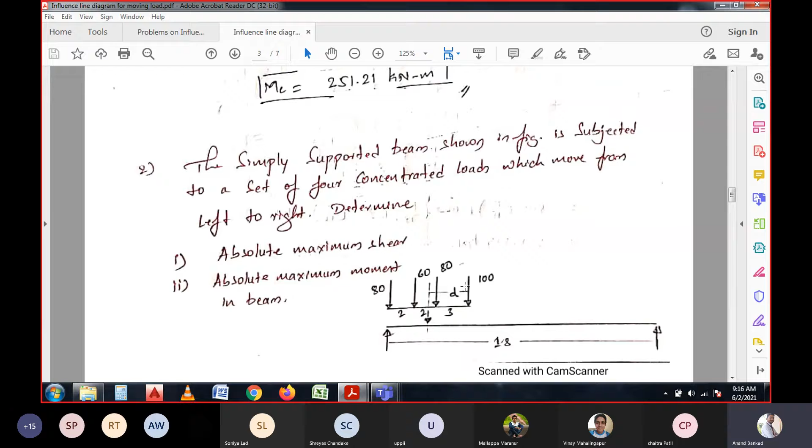But here, no section is given, and they have not asked to calculate the shear and moment at any particular point. Instead, they ask in general to determine the absolute maximum shear force as well as the absolute maximum bending moment for the beam, for this series of concentrated loads moving from left to right. So that is the question. We need to understand that we are not aiming to calculate at any specific section — that is the only difference in this problem.

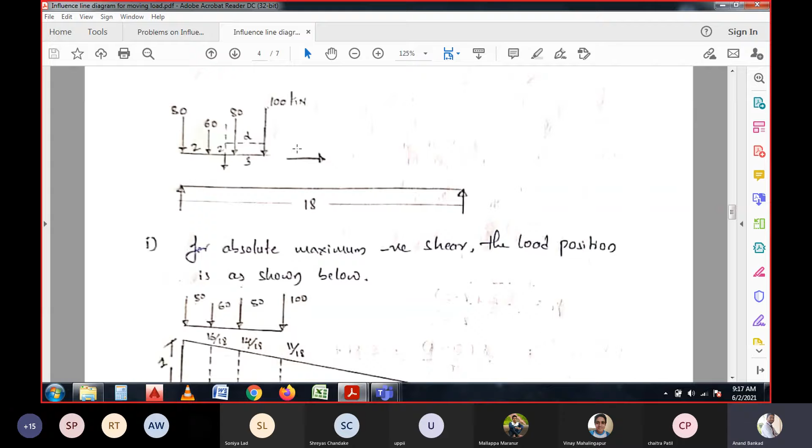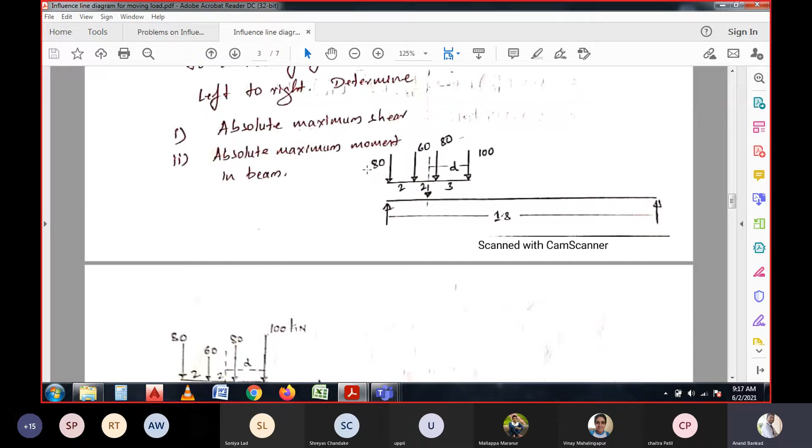So once we start the problem, the question needs to be carried forward for further calculations. We have an 18-meter span with two supports on either side, and the loads move from left to right, with an arrow showing the direction of movement. In this question, they have already given the set of loads, identifying which load is leading and which load is trailing.

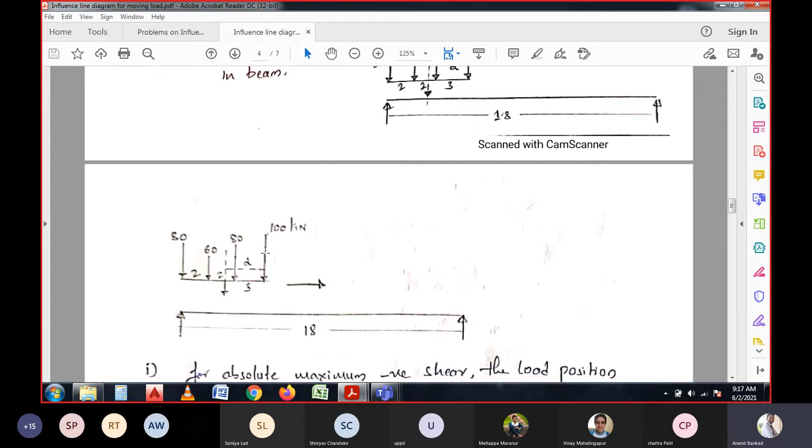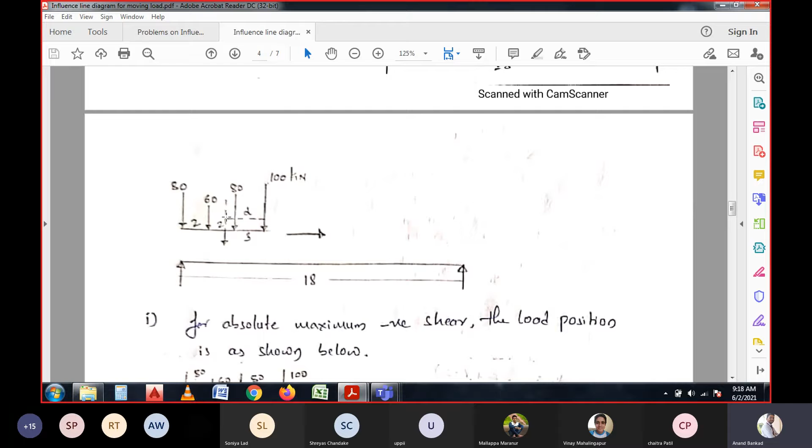On that basis, the load positions are considered. In other cases, the moving loads might be given simply as a trailing load and a leading load, and based on that we set up the loads. But in this question, the set of loads is given directly in the diagram: 100 kilonewton, 80, 60, and 80 kilonewton loads. These four concentrated loads have a distance of 3 meters between the first two loads, and the remaining ones have 2 meter consecutive distances. So, if we want to calculate the maximum shear force, what do we need to do?

Whenever the maximum shear force is calculated for any section, the load on the section should be considered near the point where we are going to calculate the shear. That means, for a particular beam, I would like to demonstrate this.

Let's take a few seconds here. So, if you see a beam with a support, and the particular beam is to be calculated for shear force — if you apply the load at the center, then the shear force value will be almost equal to zero. But if you apply the load near the support, then the shear force value will be maximum.

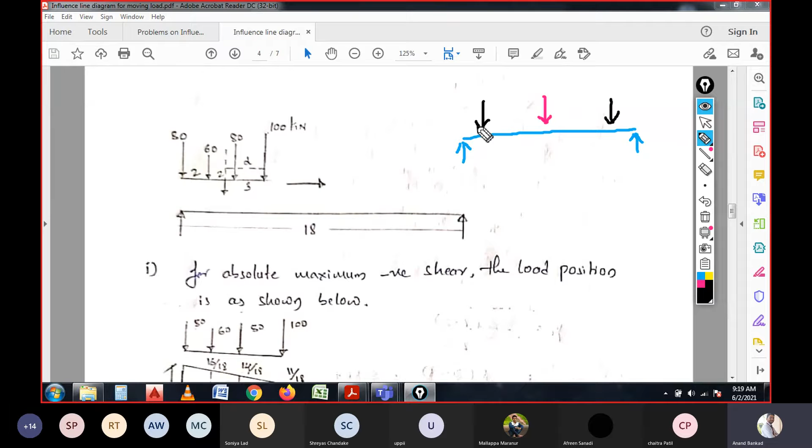Do you people agree with this content? Are you people agreeing with this? When the shear force or loads are acting near the supports, then the shear force will be maximum.

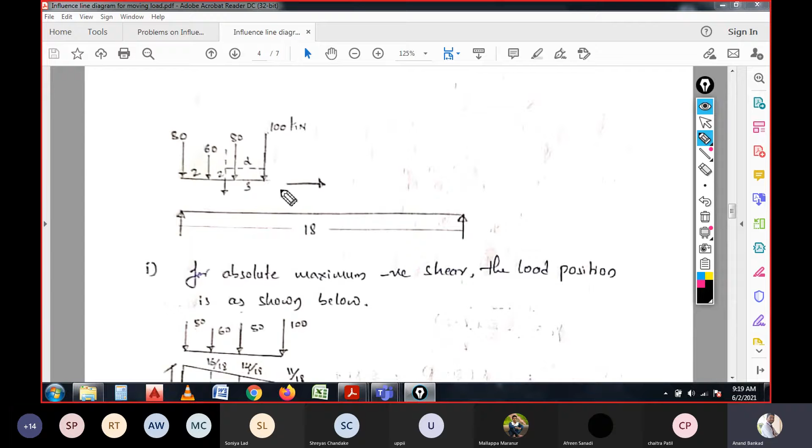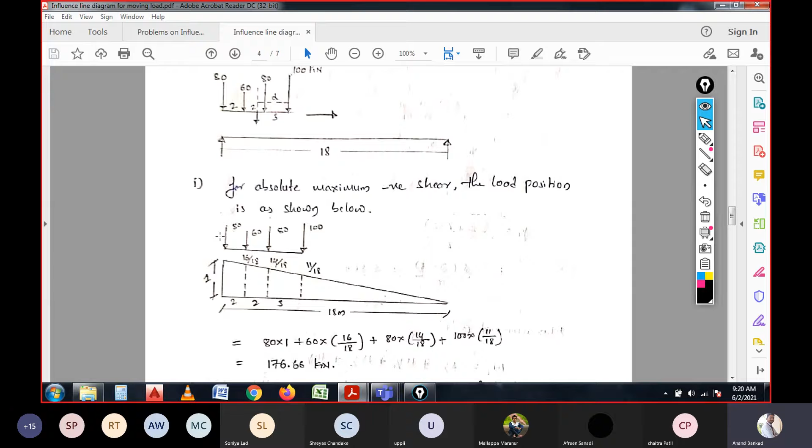Yes, okay. That means in this case, the same principle is adopted for calculating the absolute maximum negative shear. It is written as negative shear because we have considered the set of loads over the left supports, and the load positions are already shown in the diagram. So again, we need the coefficient values — and how do we get these coefficient values?

Just see, I hope it is clearly visible. For the set of loads, the 80 kilonewton load is acting at the point of support, and the remaining loads are acting with their respective distances. In the 18 meter span, the first set of loads is acting from the right support.

We can calculate from the right support and from the left support by referring to the distances. Here it is 3 meter, here it is 2 meter, and here it is 2 meter. So in the total 18 meter, how much is it? 3 plus 2 is 5, plus 2 is total 7 meters, and the remaining will be 11 by 18.

That means from this support, it is measured 11 meter to this point. How have we considered 11 meter? That is deducting this 2 and this 2 and this 3 meters. And from here to here it is 11.

Again, if you consider this point, then how will it be? 11 plus 3 will be 14 by 18. 18 is the total span. Again, for this concentrated load, the coefficient value will be 14 plus 2, which is 16, divided by 18. This is how the coefficient values are considered.

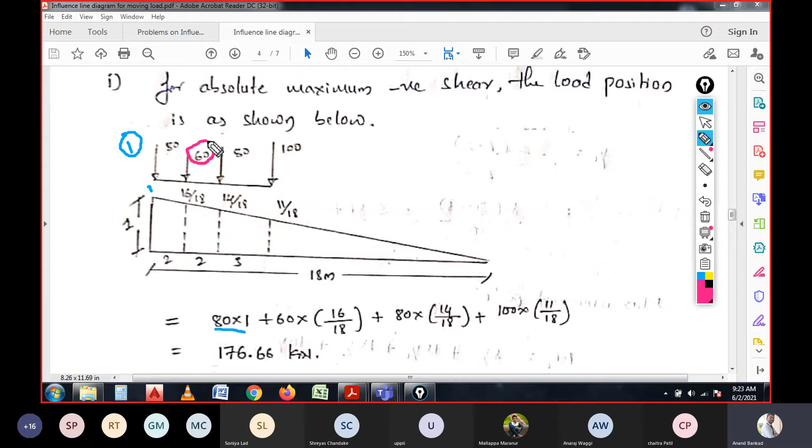So let us consider one by one. This is the first load, considering 80 with the intensity 1, that is 80 into 1. Next this 60 into 16 by 18 is considered here. Next we have this 80 into 14 by 18. Again we have 100 into 11 by 18. That means the intensity of load multiplied with the coefficient values.

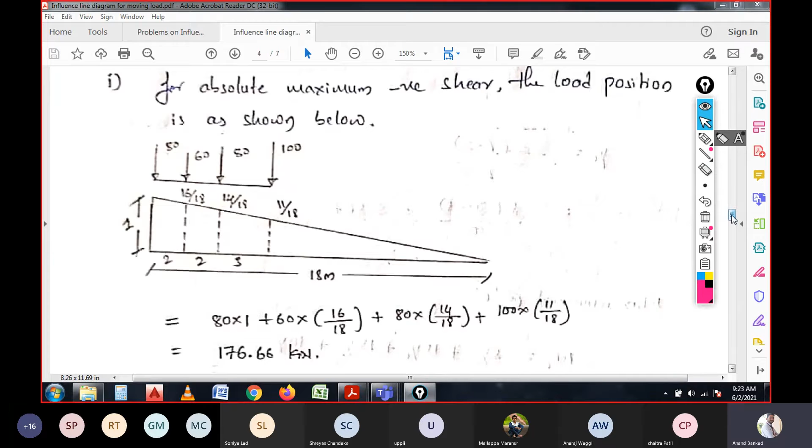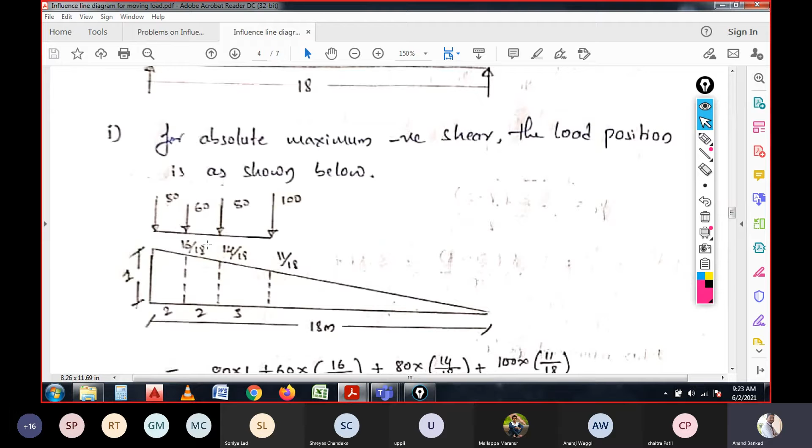The coefficient values you can always calculate in this manner. So once you solve this, it will be 176.66 kilonewtons at this support, when the loads are placed near support A. At the same time, if you place those loads towards support B, or towards the right, then we can say that is the positive shear force.

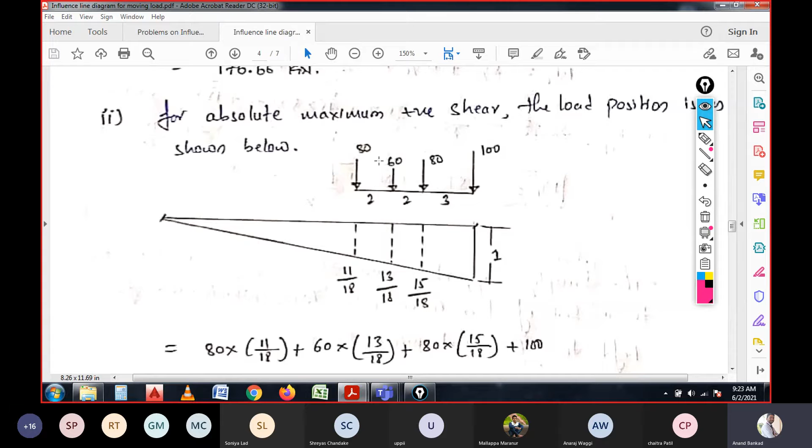Then again the loads are measured from the distance of the other end. So other end means, if you see, it is this end for the loads setting for the right side, whereas previously we saw for the left side, from the support on the left side. Again, if you measure, the first distance will be 11, the second will be 13, and here it is 2 meters.

In the total span of 18, if you see, 7 meters are deducted, then it will be 18 minus 7, which is 11. The 7 is because 3 plus 2 plus 2. So from here to here it is 7 meter, and the total distance is 18. In this 18, if you deduct this 7, from here it will be 11 meters.

And from this support to here, it will be 11 plus 2, which is 13. Again 13 plus 2 will be 15, and 15 plus 3 will be 18. 18 by 18 will be 1.

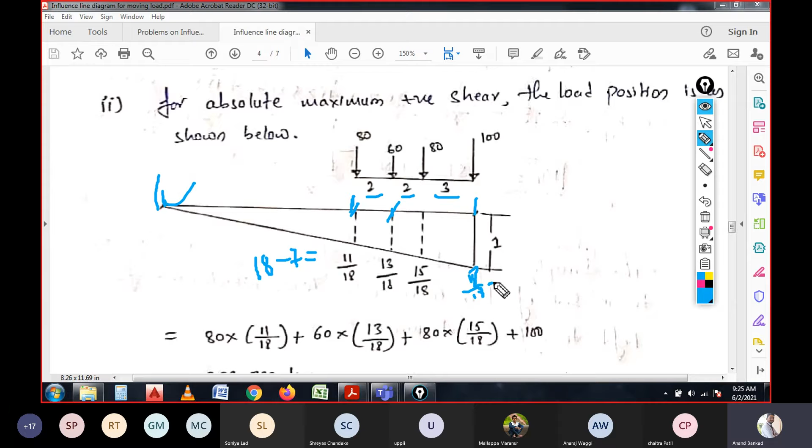So again, with respect to these, if you calculate the values of shear force, this 80 into 11 by 18 is the value here, and then 60 into 13 by 18.

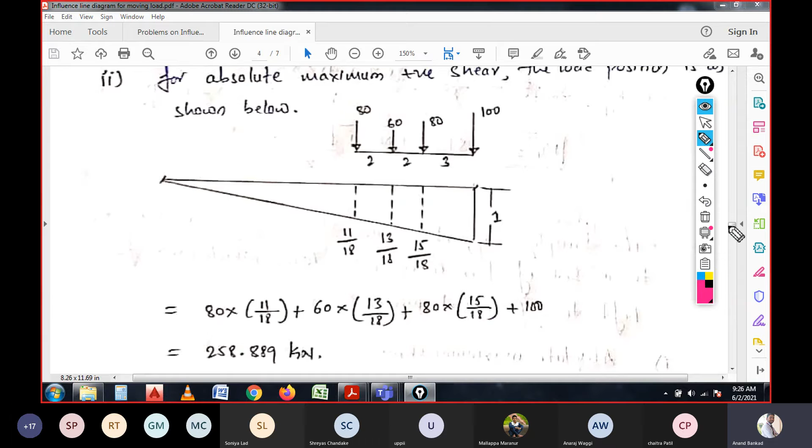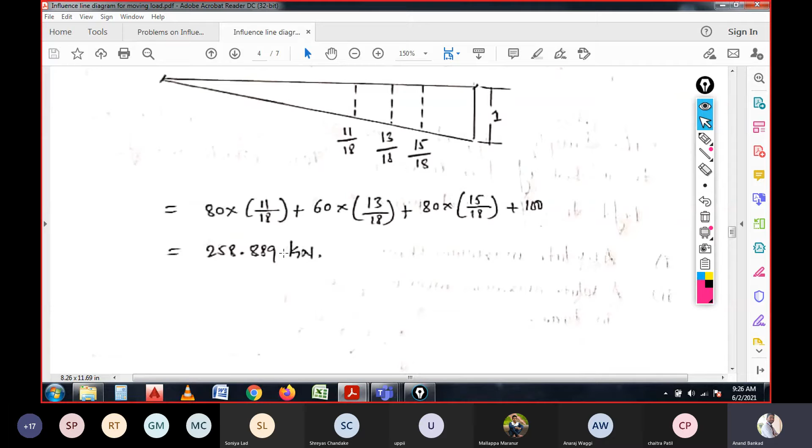We are multiplying the coefficient values for the intensity of load. Again 80 into 15 by 18, then 100 into 1, which is equal to 100. The total shear force we can expect from the load when it is placed right side near the support is 258.889 kilonewtons. That means the maximum shear force on the support, which is what they have asked to calculate, the absolute maximum shear force, is 258.889 kilonewtons. This is how we need to calculate the maximum shear force for the support.

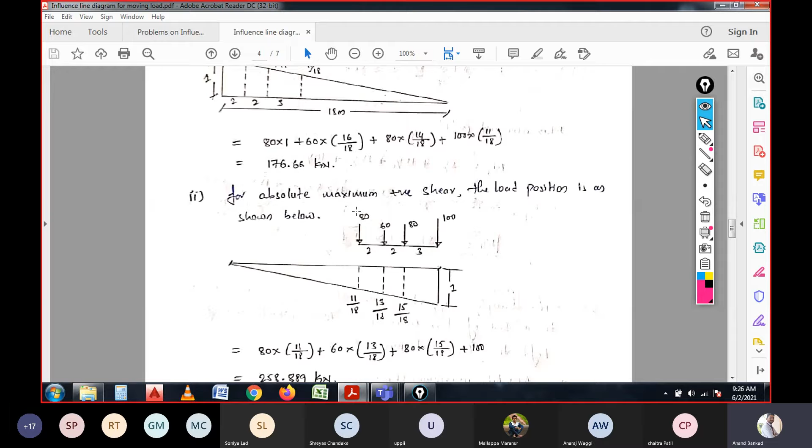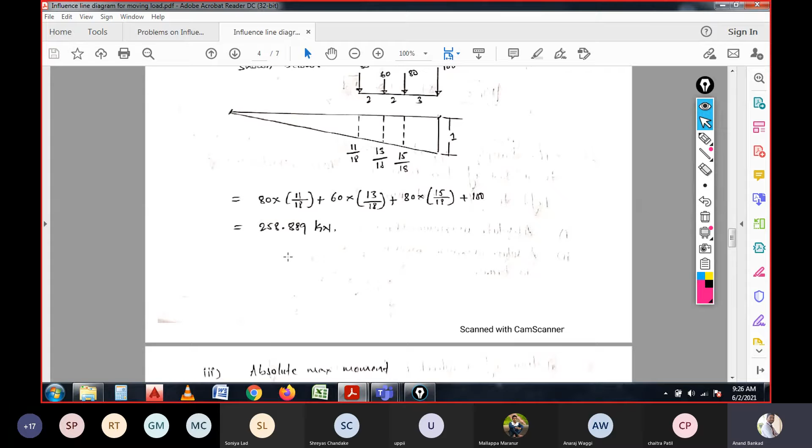But here we are not saying any negative shear force or positive shear force. Just we are saying that the maximum shear force, whether it is negative or positive. We are not representing with sign or any notes. Just the maximum shear force is calculated. Is this clear, dear students?

Yes, sir. Okay, remaining, how many of you people are listening over here? Is this clear? Yes, sir. Okay.

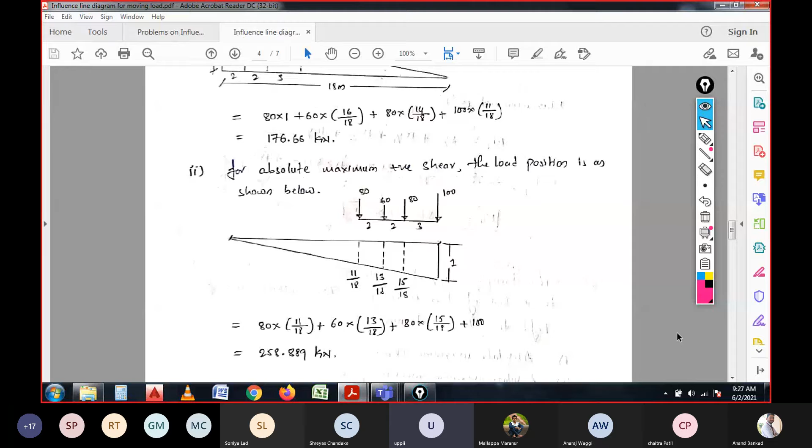Now another thing is absolute maximum moment. Next we need to calculate the maximum moment. This is a bit lengthier to calculate here, because the series of loads have different intensities. So for this we need to find the CG of the loads, the same thing we considered in the previous problem, and here too we need to carry out the same process. So for finding the absolute maximum moment, before that we should know, whenever a beam is loaded...

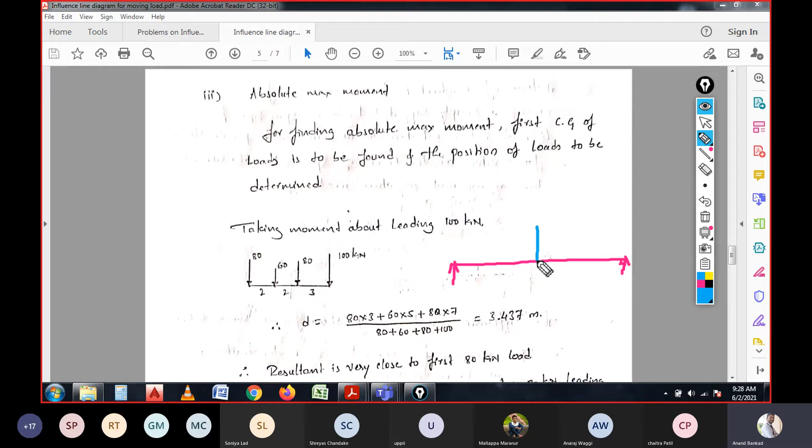If the beam is loaded with any kind of load, whether it is uniformly distributed load, concentrated loads, or uniformly varying loads, any kind of load, if the loads are placed at the center of the span, the bending moment will be in this manner. And if the particular load is placed at this point, the bending moment will be like this. And again if the load is placed at this point, the bending moment will be like this. That means the position of the load, where you place it, matters a lot.

So on this content, I would like to ask any one of you, please let me know, in which place, if you place the load, you get the maximum bending moment? In which place do you say or prefer to place the load or set of loads to get maximum bending moment? Center? At the center, right?

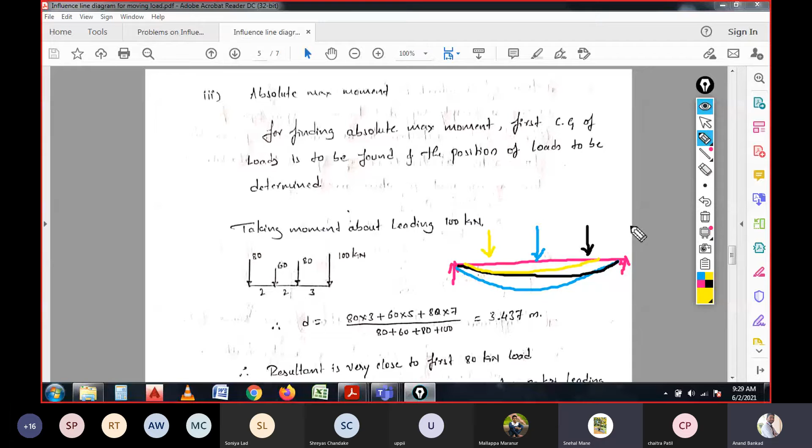Okay, so on this concept, if you see, here we have a set of loads, correct? In this set of loads, we need to have—we don't know exactly where the center of this set of loads is. But if we have only one concentrated load, then it would be easier for us to place it centrally and get the maximum moment.

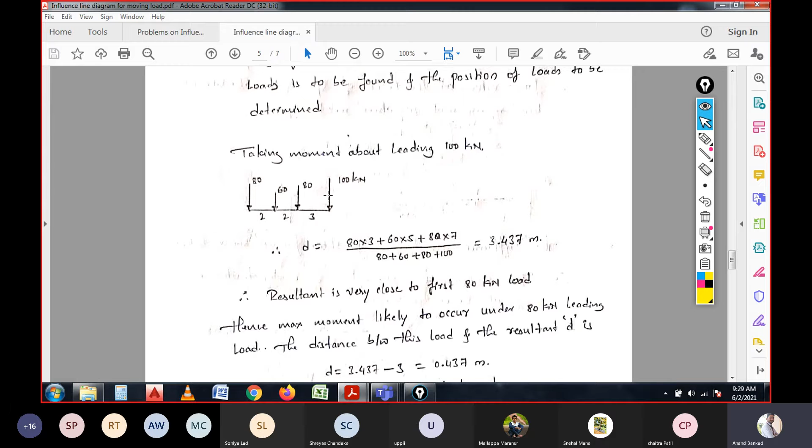But in this case, we don't have a center point for these loads. In that case, we are now calculating the CG of the loads. So how do you calculate the CG? That means we can take any one point as a hinge, then take all the loads and multiply them with their distances.

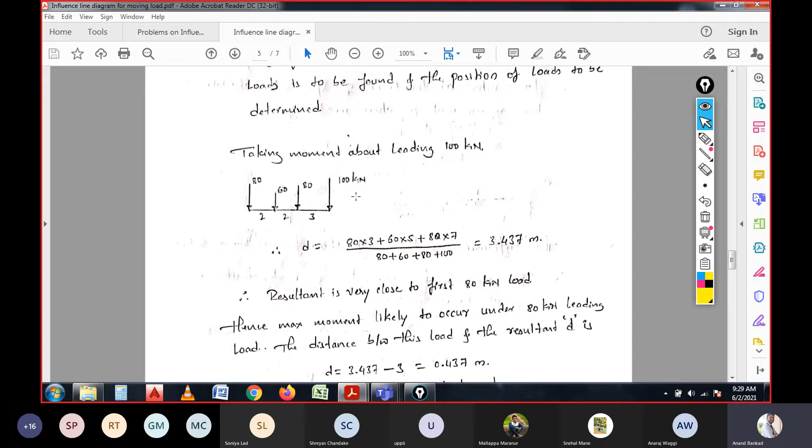So taking moment about the leading load, just observe over here how the calculation takes place for the CG. When taking moment about the leading load of 100 kilonewton—so for 100 kilonewton the leading load is considered—and this 80 into 2 plus 2 plus 3 is there. This 80 into 3 is the first one, and next 60 into 5, and 80 into 7. The same thing is written over here: 80 into 3, and that is 80 into 3 written over here, and then next 60 into 5 it is written over here, and then 80 into 7, that's 80 into 7 it is written, divided by the total sum of loads 100, 80, 60 and 80.

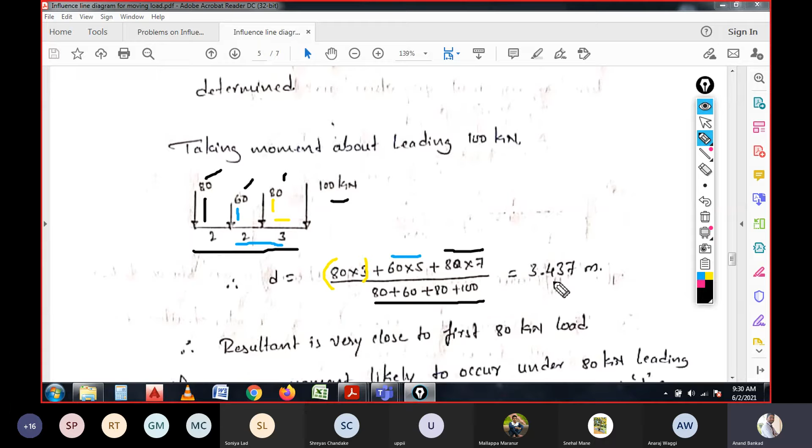So if you take all the set of loads, then you get 3.437 meters. So 3.437 meters, this distance—whatever distance we have got—is nearer to the load of 80 kilonewton, because we have taken the point over here. If you measure 3.437, it will be near to the 80 kilonewton load, right? That means it does not lie exactly at 3, it has some 0.437 meters of eccentricity, right? Are you getting what exactly I am telling here?

See, this is the load case, and here we have 100 kilonewton load, here we have 80 kilonewton load, and here we have another 60 kilonewton load, and again this is another load.

So for this, what we have got is 3.437. That will be again at this point itself. That might be lying with this, but here we have 3 meter. But here we have it is 3 meter, right? So the remaining thing is...

0.437, which is eccentrically acting for this 80 kilonewton load, right? So that means the distance of this one is 0.437. Are you getting?

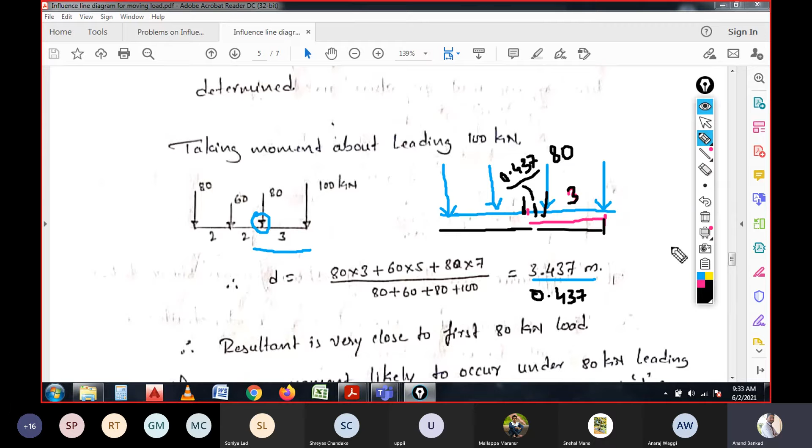So here, if you take the 80 kilonewton load, it is 3 meter, and remaining we have 0.437 meters. Am I right? So here, if the 0.437 is left, that would be considered on half, because we have to have the CG on either side. It is the point where, because on this point we need to consider the position.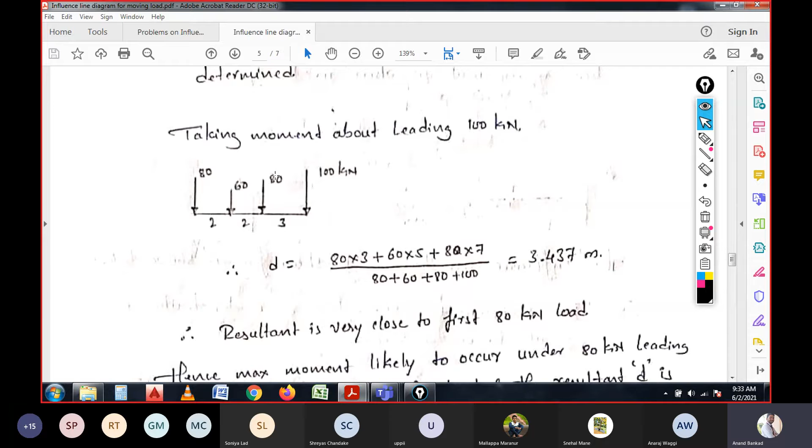The same thing I have written, what I have discussed, is written over here. Hence, the maximum moment likely to occur under the 80 kilonewton load, which is leading, because we have two loads over here. We have two 80 kilonewton loads, and this 80 is the leading one, that is why it is denoted with the notation 80 kilonewton leading load. The distance between these loads and resultant D, the resultant D is nothing but this one.

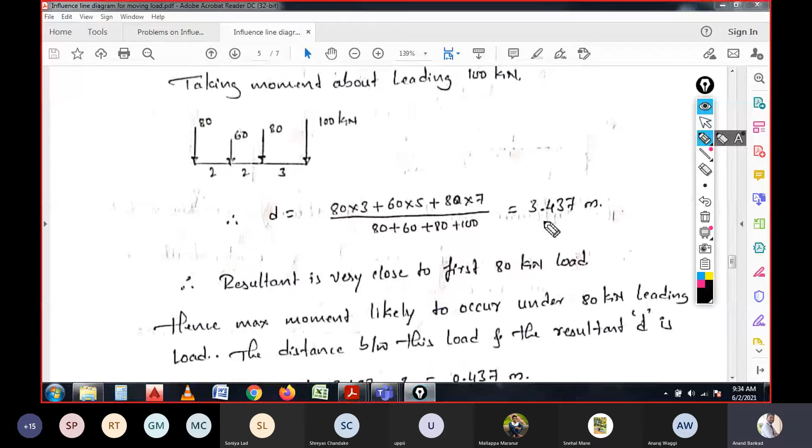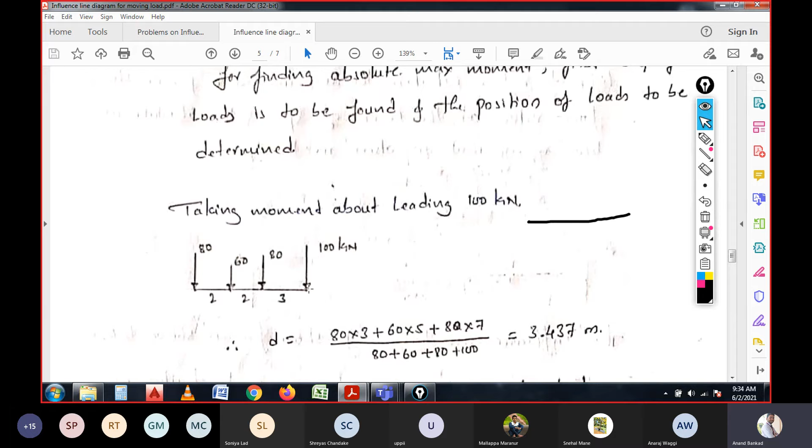Okay, so now D minus 3 meter. 3 meter is because this is the distance between 100 and 80, since we are measuring from here. So 3.437 minus 3 will be 0.437.

For this, now we need to have the CG, because the load needs to be placed center to the span, right? So it is an 18 meter span. We will be having 9 meter on either side. So this 9-meter span need to coincide with the set of loads at what distance? That distance is measured over here.

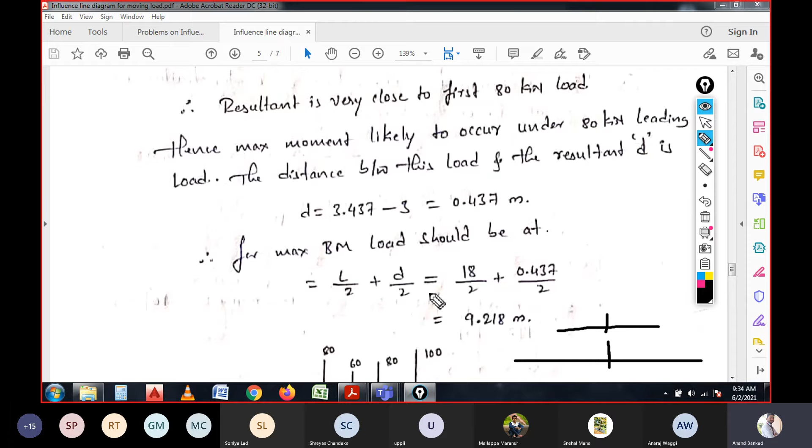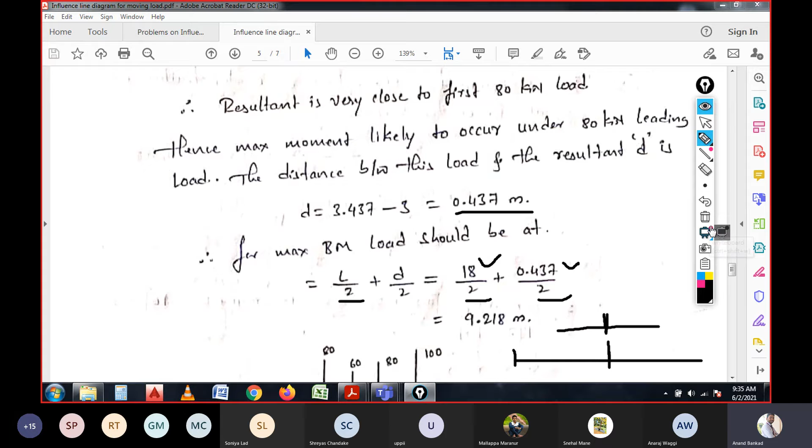So L is 18 meter, 18 by 2, and we have eccentric value of 0.437, that is multiplied and divided by 2 to have the CG. So here, if this point is obtained, and this point needs to be placed from the left end, it is 9.218, and just I will show you the diagram. The same diagram is already drawn over here, right?

This 9.218 meter we are obtaining, which is placed from the left end, because we have already measured from the left end as 3, and when the section is passed for the CG, it remains with 0.4 something, and for this 0.4 meter, when we take the CG, we need to coincide it to the center of the load, that is the CG, to the span of 18 meter. So once we get the 9.218 meter, at that position we need to place the 80 kilonewton load.

So here 9.218 is the distance what we have got. From that point we need to place this load, because the center is here, but somewhere it is lying more than the center point. Then to get the center of all loads for the span of 18 meter...

Once we place here, then the remaining distance in 18 meter will be 18 minus 9.218, giving 8.782 meters. So here this 8.782 meters is having the consideration to get the coefficient value for these loads which are acting at certain distances from each other. So here the same thing, the loads have been calculated by referring to the distances on either side of the section.

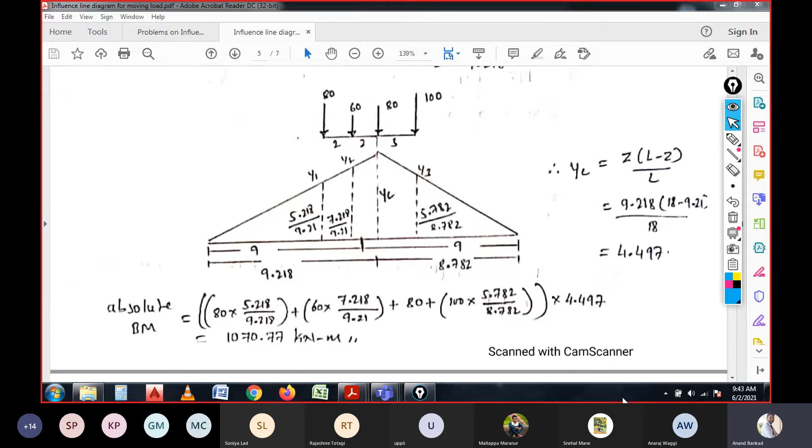So this is the total discussion we have discussed in the problem. So I hope everything is clear for you.

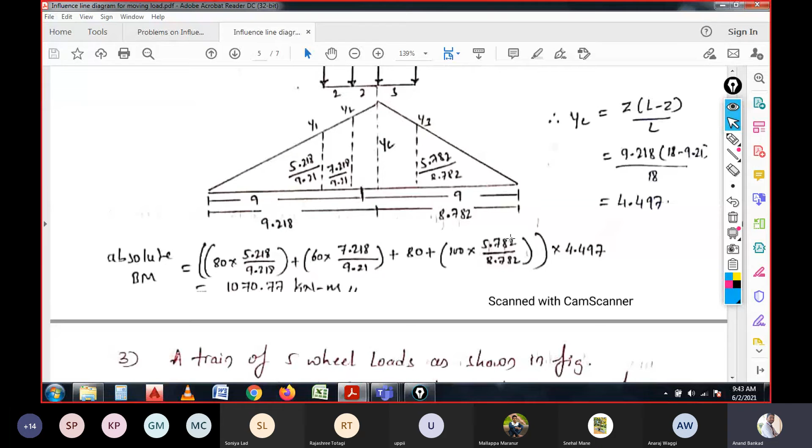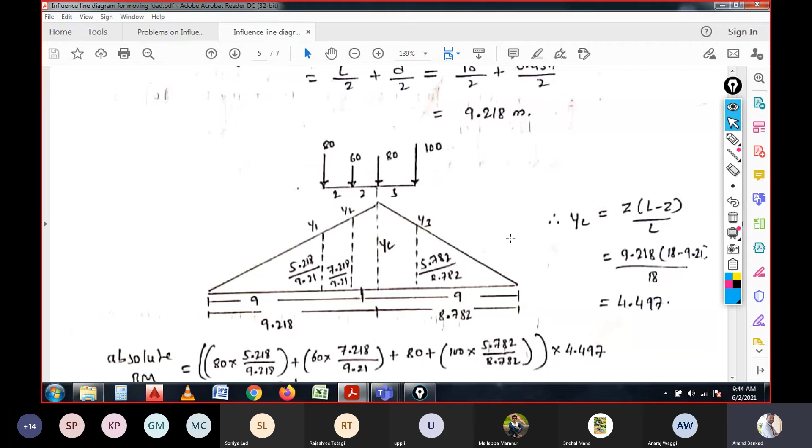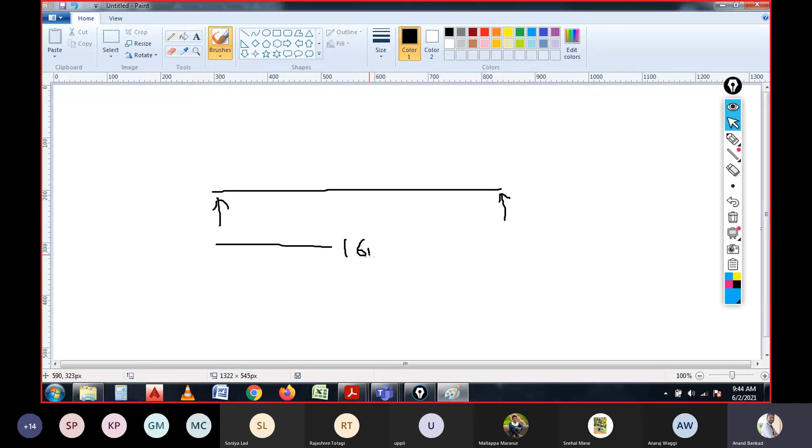I will draw over here the same question: a train of concentrated loads moving from left to right on a simply supported girder span of 16 meters. Determine the absolute maximum shear and bending moment developed in the beam. So the beam is like this, and the supports are like this, and the span is 16 meter. Please take this diagram in your books and try to solve this by referring to the problems we have discussed now.

The loads are given like this, having 4 concentrated loads, with distances of 2 meter, 2 meter, and 3 meter, and the intensity of load is 40 kilonewtons. All loads are in kilonewtons, please note it. Here it is 80, here it is 60, and here it is 20.

Let us say this as support A, and let us say this as support B. Now, the same question we discussed today, but the span is different, and the load and the center to center distance between the loads are different.

I will write the answers for this. The maximum shear - let me repeat the question. The train of concentrated loads which moves from left to right on the simply supported girder of 16 meter, determine the absolute maximum shear force and bending moment developed in the beam. Again, they have not asked any section over here. Keep it in mind, these types of questions will be there in your external exams in all question papers. Whatever we referred in previous question papers, these types of questions will be there absolutely, and they are going to carry a maximum weightage of more than 50% of marks for your particular module.

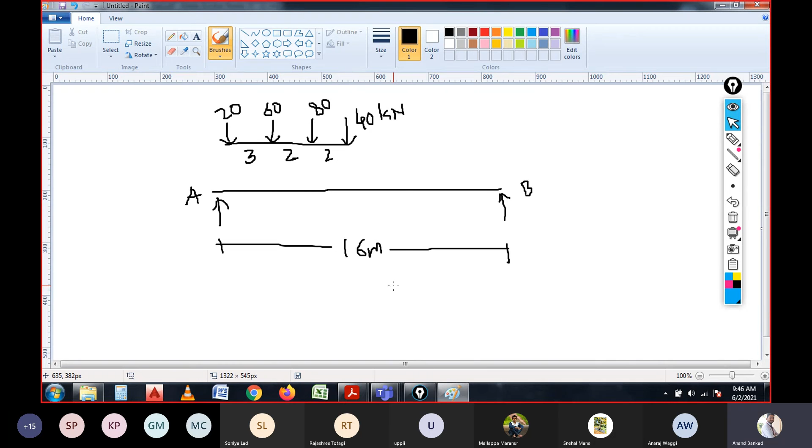So when you calculate the maximum shear force, SF, that is the answer. You can verify it yourself, and some values like 2.25 may get vary. That is absolute shear force of 166.25. That is the answer for the maximum shear force once we calculate.

And the bending moment is 651.52, which is having kilonewton meter as the unit, and shear force is in kilonewton.

Right? Do you people solve this? Yes, sir. Okay. And the same question we discussed today, but the span and load intensities are different. I think whatever numbers I have written are clearly visible, and you can notify these things.